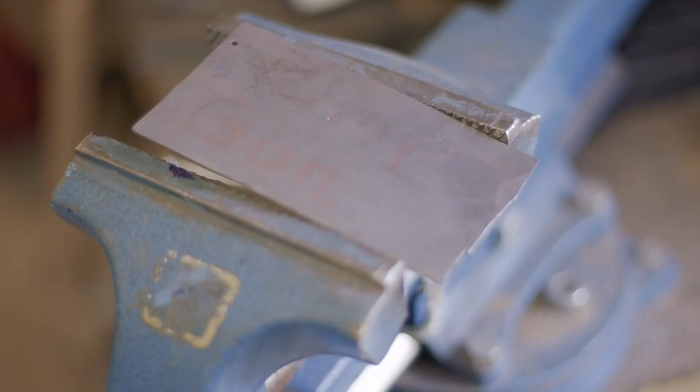For this knife build I use parts of the Damascus steel that I made in the last video. The small bar is made of pumpgun steel and the larger one is the 128 layers Damascus steel that I made the last time.

It's the first time for me that I start and finish a knife build in one video. In the beginning I make the individual pieces for the knife, then forge weld them together, do the heat treatment, edge it and make a handle and it's done. But first I show you how I make a herringbone pattern.

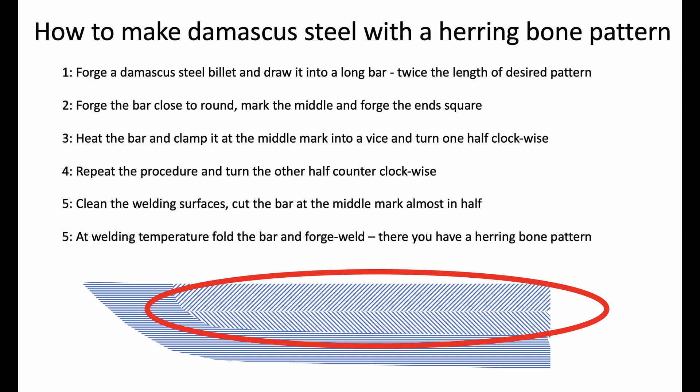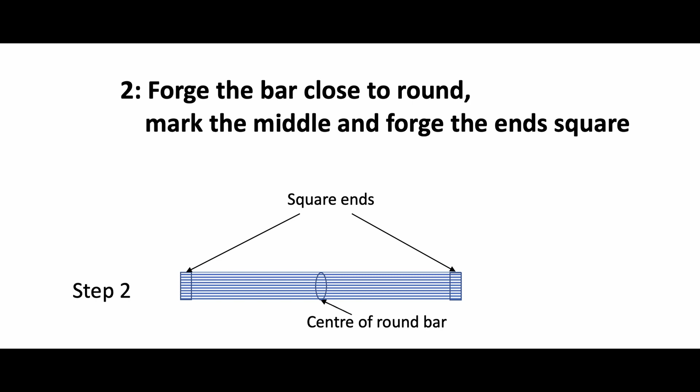I forge a Damascus steel billet that is double the length that I need for the pattern. I forge the bar round and leave the ends as a square. Then I heat it, clamp one half in the vise and turn the other half clockwise. Then I do the other side counterclockwise.

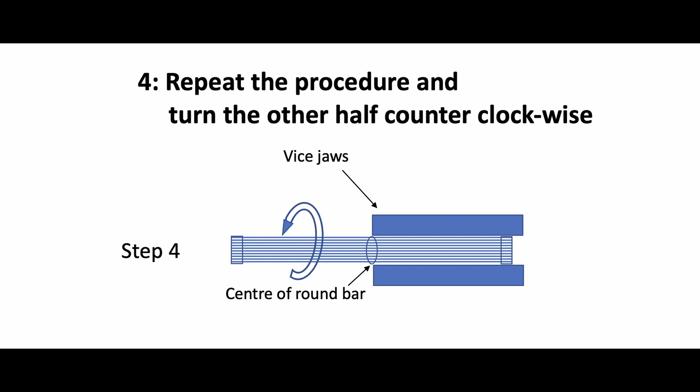After that I clean one part of the surface where I want to weld and cut it almost in half. The last steps are folding, forge welding and then the pattern is finished. And that is the design for the knife. Herringbone pattern, pumpgun steel and then O2 steel as a cutting edge.

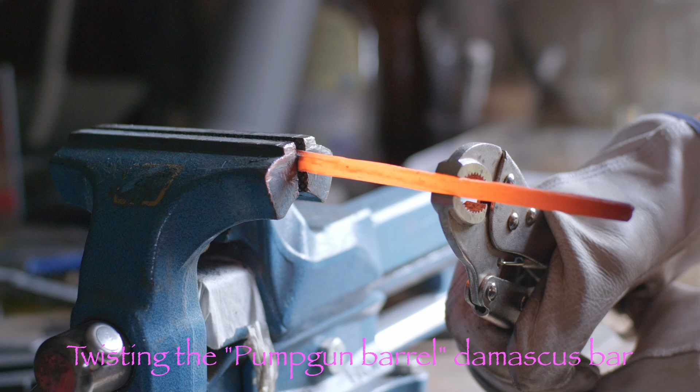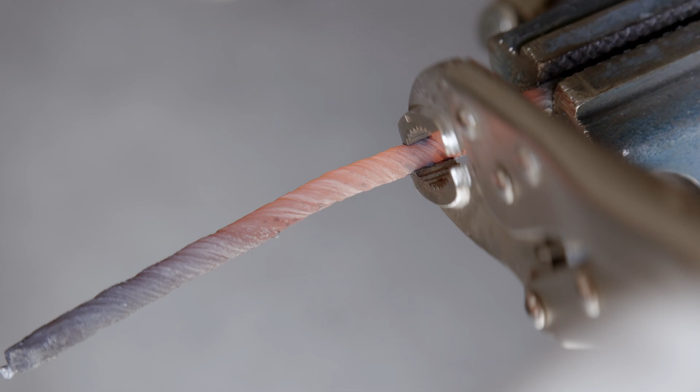Since the pumpgun Damascus steel billet has been made in the last video already, I can immediately start to twist it. This bar I only twist in one direction. I hammer the bar flat because it's gonna be sandwiched between the O2 cutting edge and the herringbone pattern.

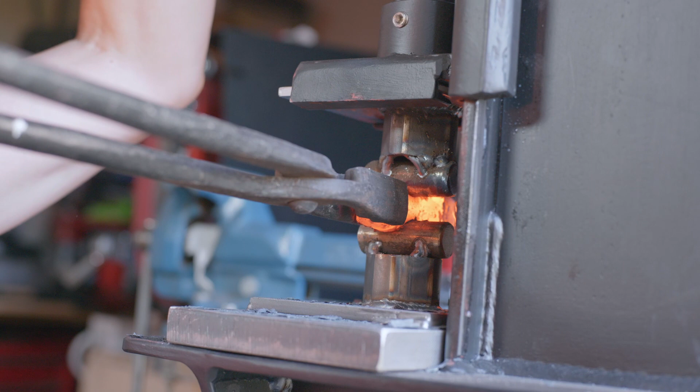It is time to forge the O2 tool steel into the right dimensions. The starting billet was almost 2 by 2 centimeters, so you can see how effective and strong my new forging press is. And now it has reached the final thickness.

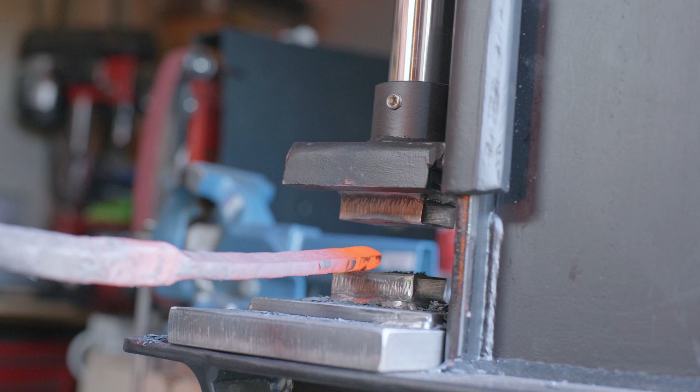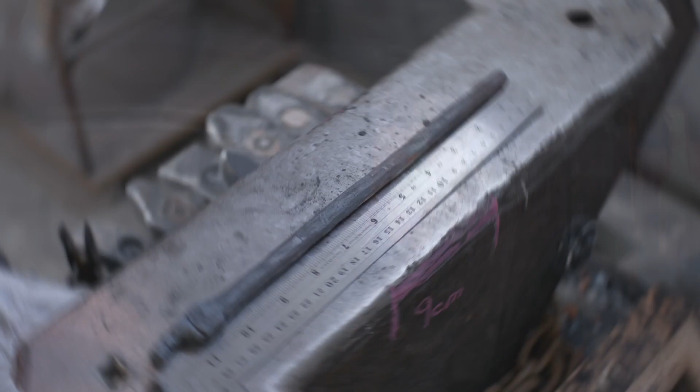That means I can start to draw out the 128 layer Damascus steel that is going to be used for the herringbone pattern. At first I forge it square, make it round, mark the middle and it's time to twist it. The first half clockwise and then I turn it around and the other half is going to be counterclockwise.

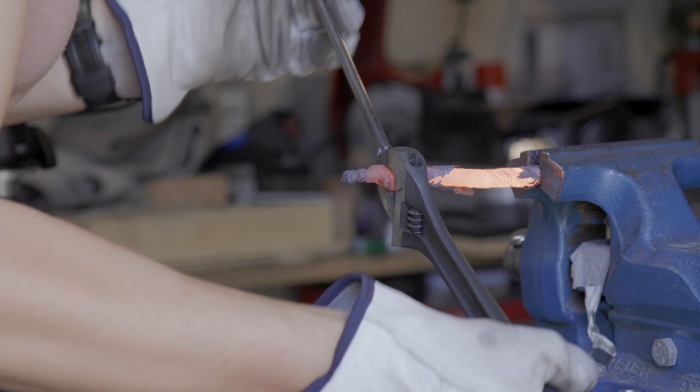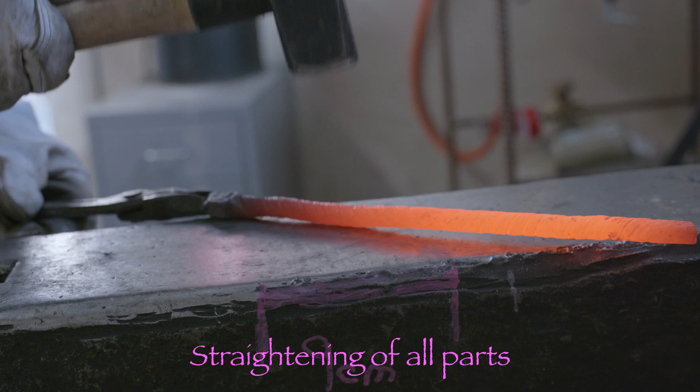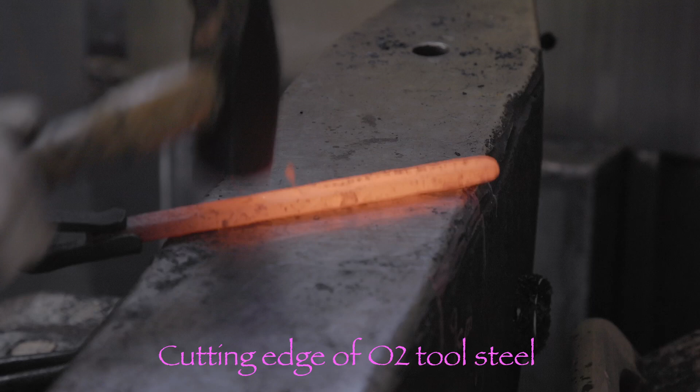After the twisting, I straighten it and I make all parts straight so that I can forge weld them together. Once they are straight, I clean the surfaces where I want to weld them.

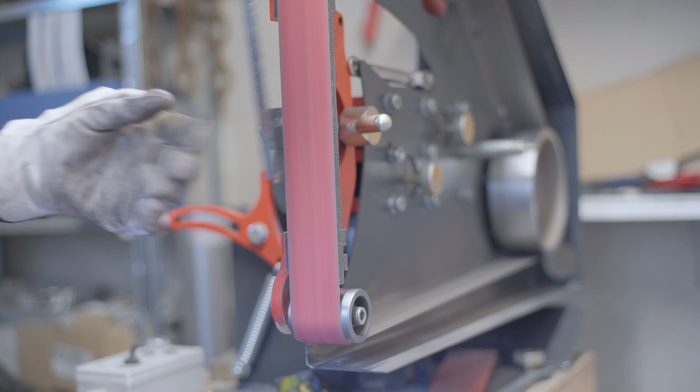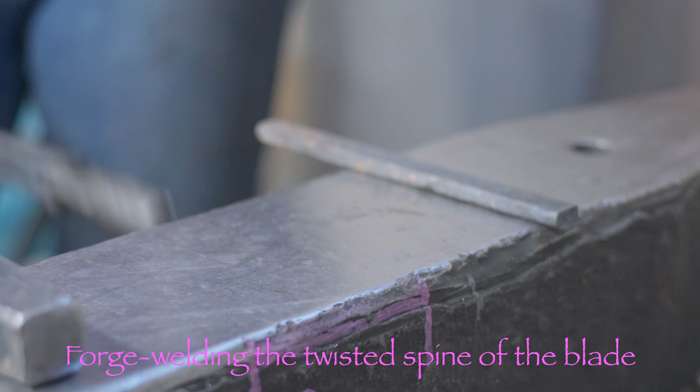At first, I start by finishing the herringbone pattern because I need it done before I can forge weld all the pieces of the blade together. As usual, I'm going to use borax as a flux for my forge welding operations and I also clean the parts in between. I set the initial welds with fast and light hammer blows.

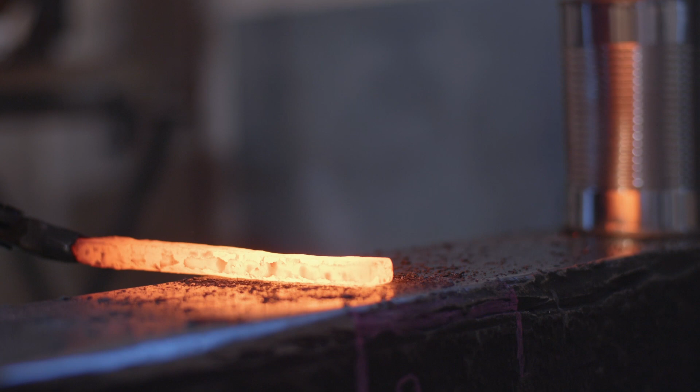Once I'm sure that the weld is good, I start to use harder hammer blows, although I need to make sure that the pattern is not disturbed too much. The herringbone pattern has to be long enough so that I can use it for a knife with a 9 cm blade.

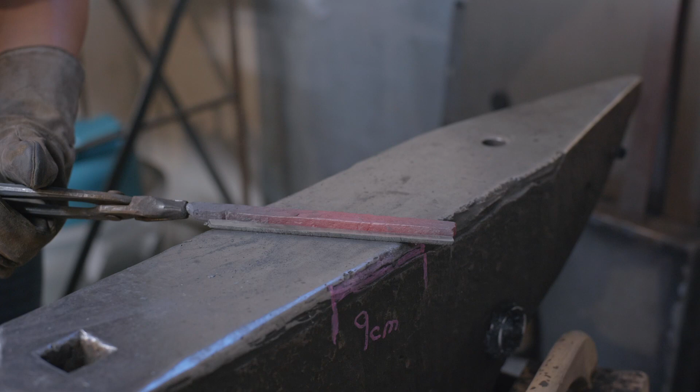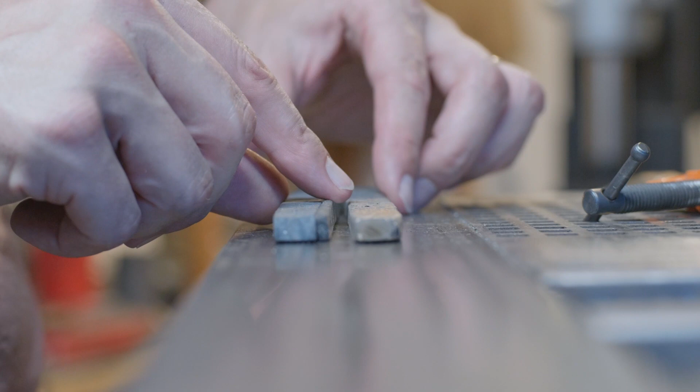Making it straight again. And it matches perfectly with the pumpkin steel Damascus. Cleaning the welding surface again. I assemble the three parts of the knife blade and then tack weld it as a preparation for the forge welding. The pumpkin steel in the middle, the herringbone pattern on top and the O2 as a cutting edge.

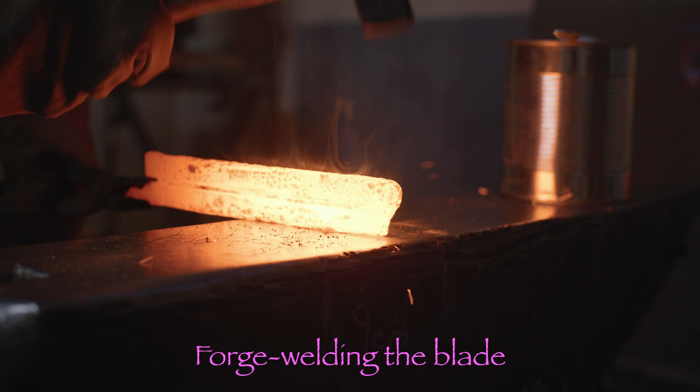I start the forge welding with light and fast hammer blows again. This is the part of the knife where the tang will be, and here the forge welds need also to be very secure.

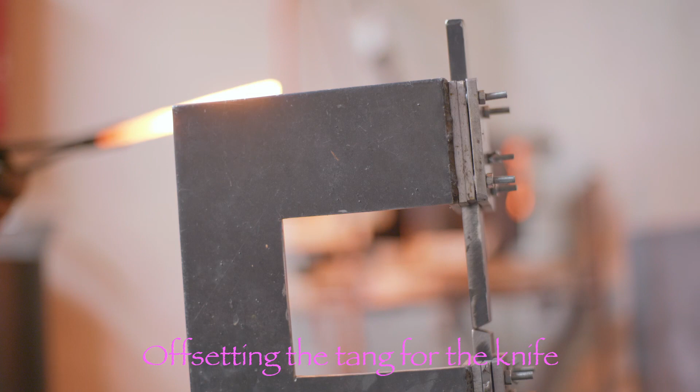It is time to offset the tang for the knife. And I use a guillotine tool for it, and these dies make sure that they cut in a straight line, as you can see here. I draw out the tang.

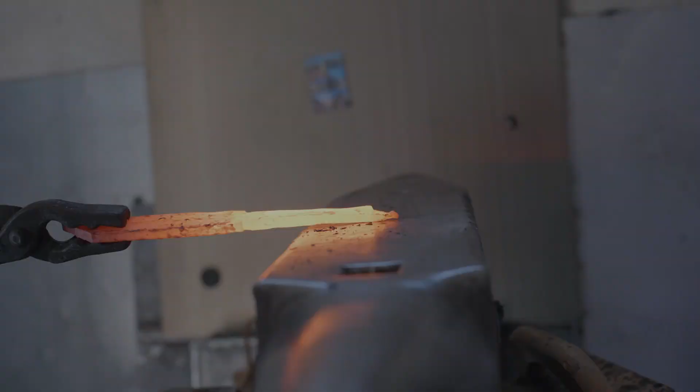I want the Damascus pattern to follow the form of the knife, and therefore I cut the tip at an angle and then slowly and with light blows bend the tip over. I need to be very careful because there's lots of shearing forces that are very hard on the forge welds, and I need to make sure that they stick together.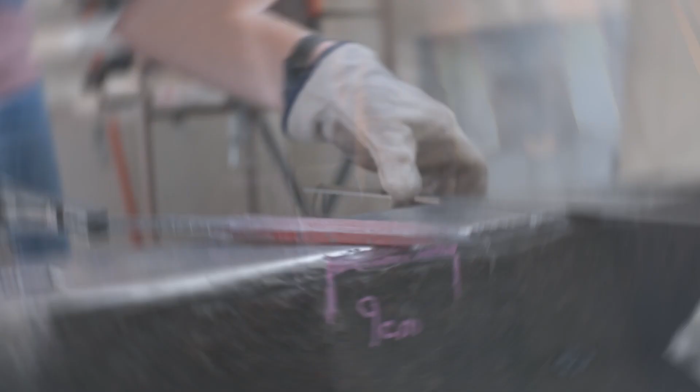It is finally done, and now I forge the knife into its rough shape. I start to forge in the bevels because then I don't need to grind away so much material. Checking with a ruler if it's long enough, and 9 centimeters is exactly what I was aiming for. That means I can start to forge the handguard.

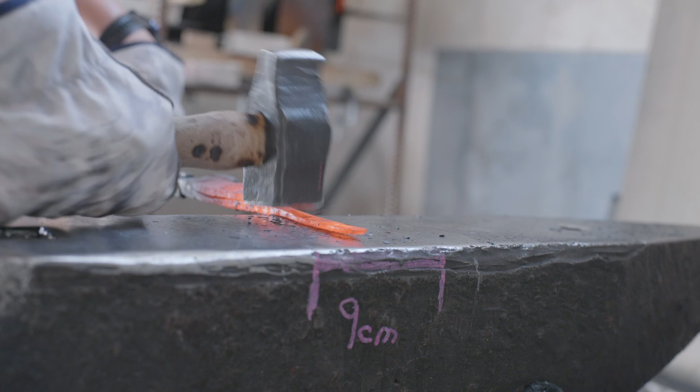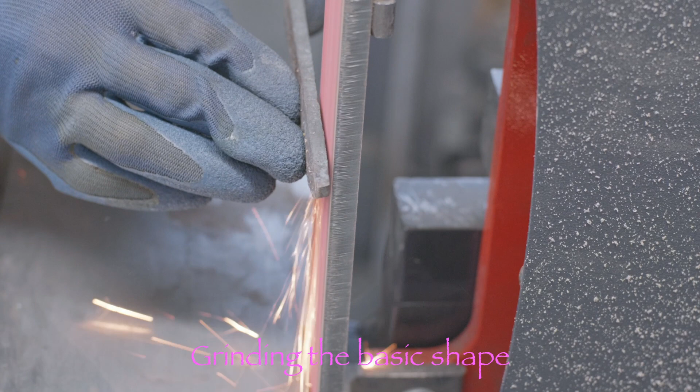I use wrought iron from an old wagon wheel, and I guess that it's more than 150 years old. When I'm finished with the forging, I let all the parts cool down slowly in the forge. That makes the material softer and easier to grind. I grind the knife into its rough shape before I resort to hand sanding.

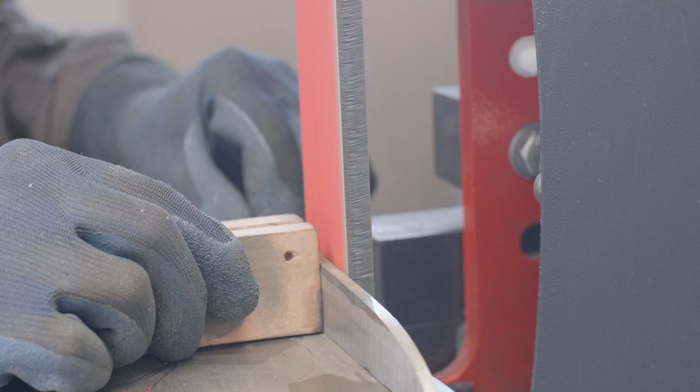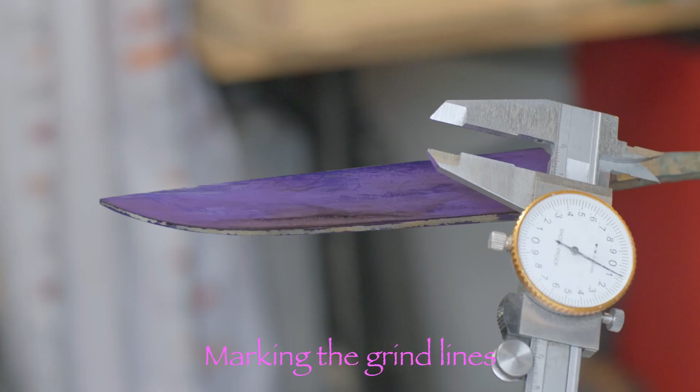I want the knife to taper from the handle towards the tip, and therefore I shift the pressure points further forward. The next step is marking the grind lines, as they help me to be consistent. I use my self-made file guide to have a nice straight corner where the handguard meets the blade.

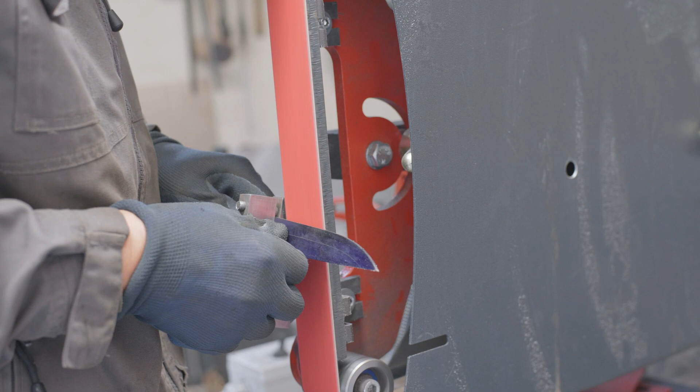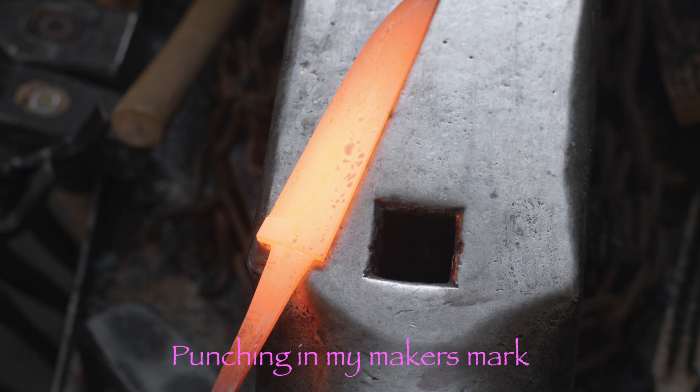At this stage, the finest belt has a grit 80 before I start to hand sand, and there I use a grit 120 to get rid of all the perpendicular grinding marks, because it reduces the risk of cracks when hardening the blade. After the hand sanding and before I start with the heat treatment, I punch in my maker's mark.

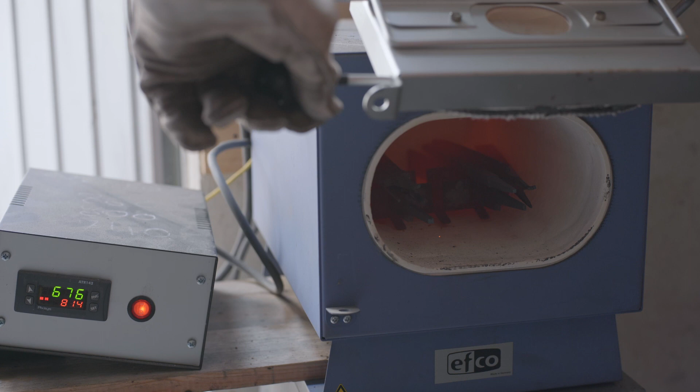I initiate the heat treatment with a normalizing cycle, making sure that the structure in the steel is fine and even. I heat the knife blade to 820 degrees centigrade and preheat the quenching oil, because a warm oil cools faster. The moment of truth has come. If you listen closely, you can hear nothing, which is very good, because it didn't crack. Testing with a file if the steel hardened, the file isn't biting, so it's good.

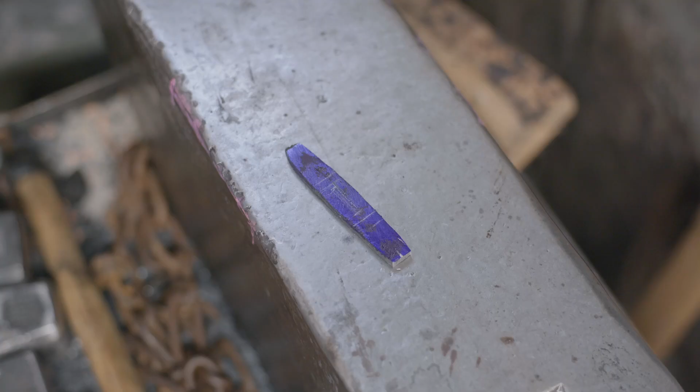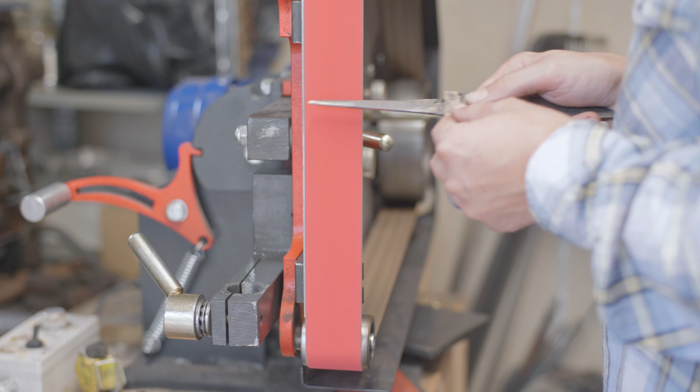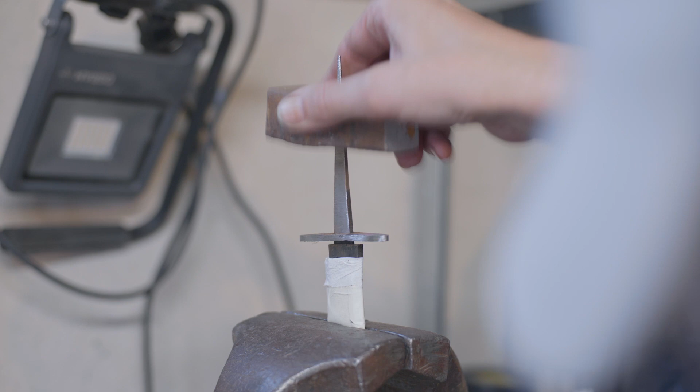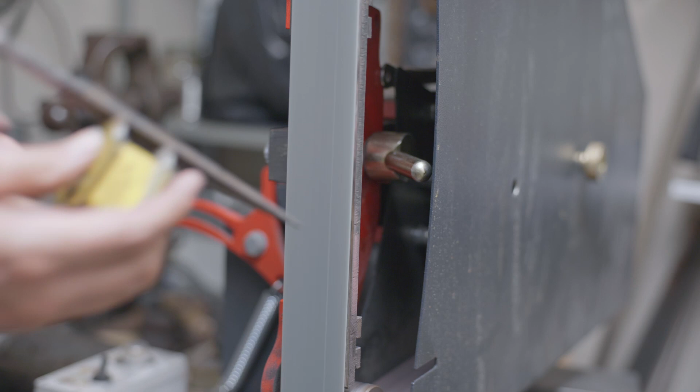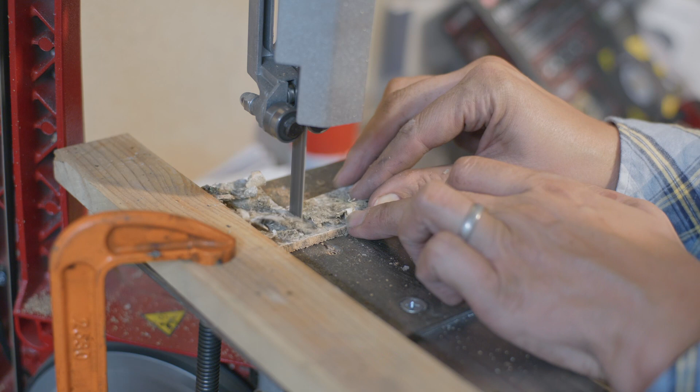In the meantime, I continue grinding and sanding the blade. I hand sand to grit 400. I etch the blade in a very weak ferric chloride solution, and that gives it a very intriguing pattern. Afterwards I prepare the parts for the handle, starting with a birch bark that I cut into 3.5 by 3.5 centimeter pieces. I start the construction of the handle by gluing together a few pieces of birch bark.

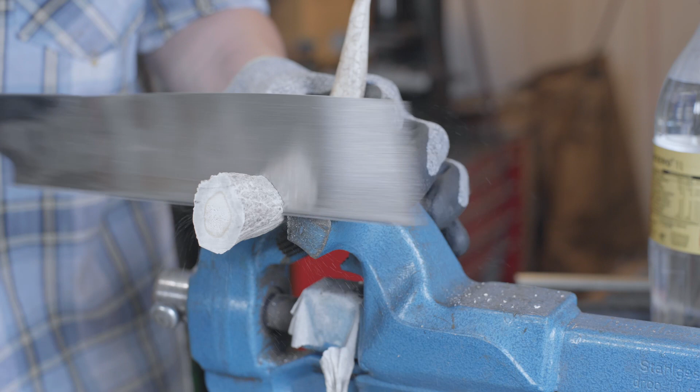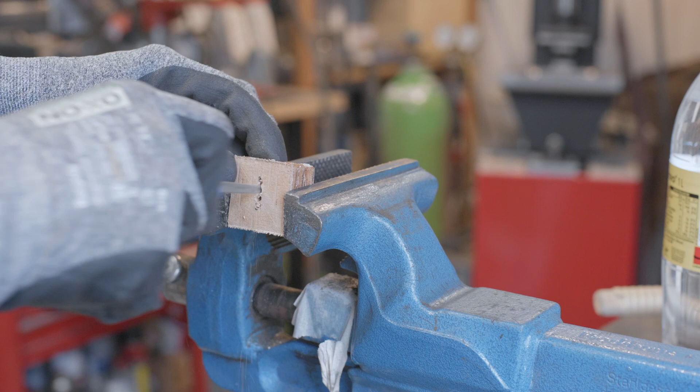I drill in holes and make them to small slits. Preparing the end cap made of wrought iron as well. It is time to glue the handguard onto the blade. I want to make sure that there's no gap between the handguard and the knife, and also wipe away all the excess epoxy.

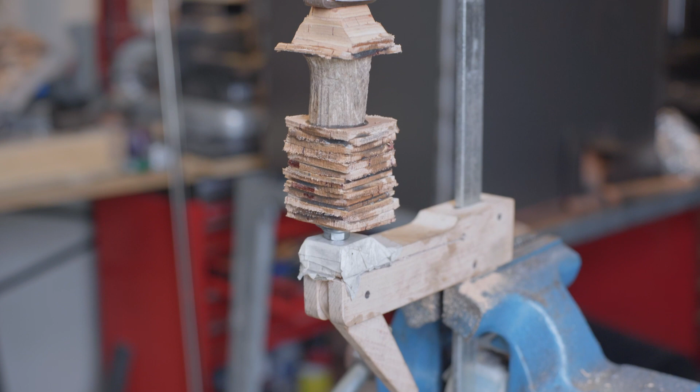Then I glue together the main part of the handle. I use an epoxy with an open time of 30 minutes, because that gives me plenty of time to assemble all the parts. When that is done, I fix the parts and let them cure overnight. The next day I take it apart, mark where I want to grind, and then start to shape the handle.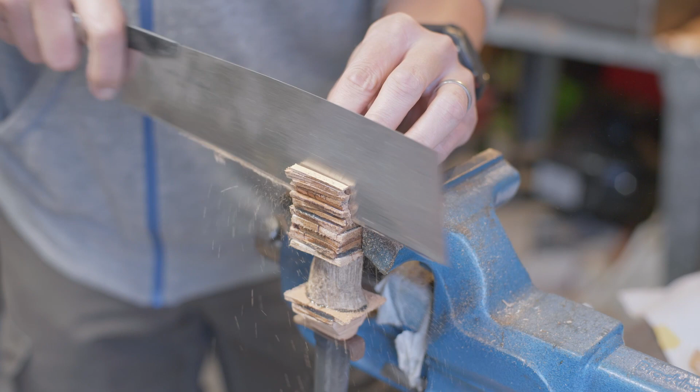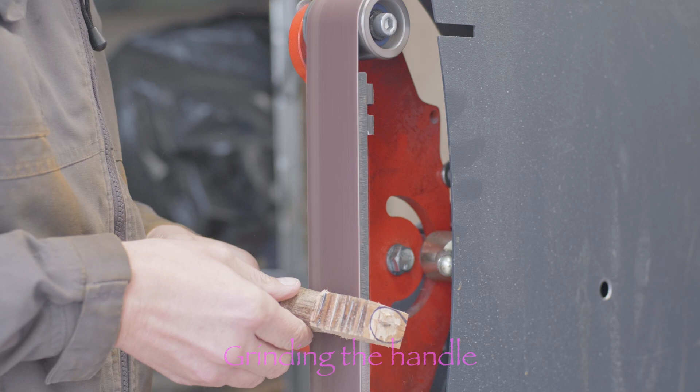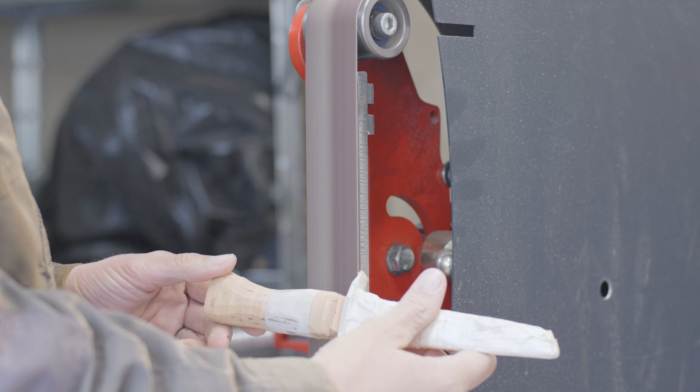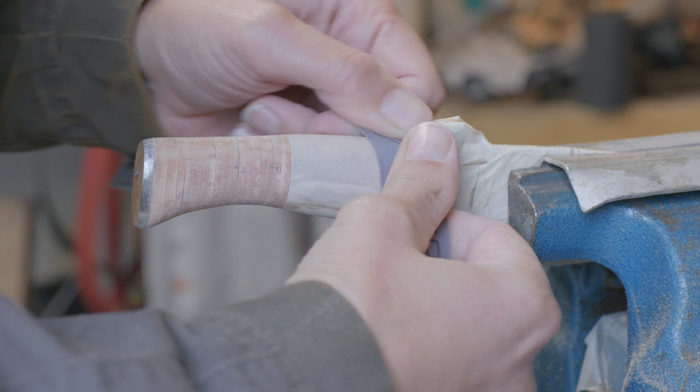Grinding and shaping a handle is very easy. You just have to grind away everything that is not part of it. And of course, that takes time and quite some practice. As usual, working at the grinder is followed by hand sanding. You can see that I mounted the end cap already. That is just to give it the final shape, and then I put it away again, etch it and re-glue it to the handle.

After the epoxy is cured, I finally pin in the small pin, making sure that the handle cannot come apart again. The final adjustments with a sandpaper of 400 grit. I use linseed oil to seal the birch bark. And it also looks good. The knife is finally done, and I think it looks amazing.